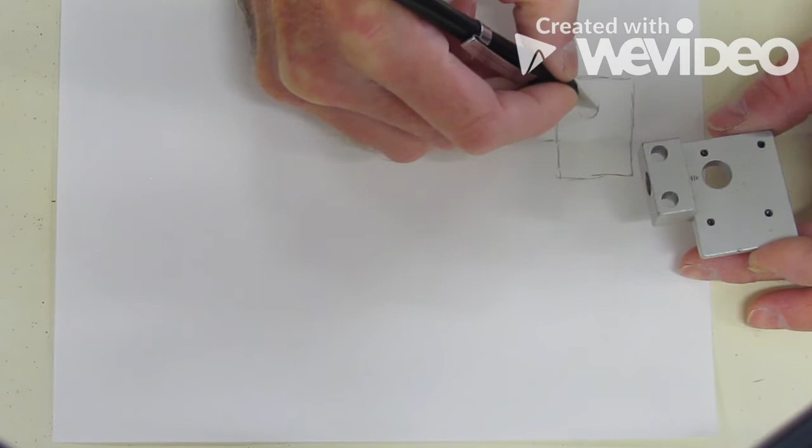I see a line there, little hole here, little hole there, big hole here, little hole, and little hole. So now there's my front view. My front view looks pretty cool. I like it. Do the same thing with the top view that we've been doing in the past.

We're just going to project up very lightly. Those are construction lines, trying to keep them nice and parallel. I'm going to create the front edge, and remember, that front edge now is this edge up here. So I'm going to rotate on that, and I'm going to see this, which is pretty neat.

So the back line is going to be here. And again, these are all construction lines, and we're going to do some erasing this time. So now, to get the rest of this, this projects up.

I'd have to do a little measuring here to know that this line exists here. This line would exist there. And these two lines would exist here. So there's my part. Like I said, we need to do a little erasing here, so these are going to go away. So far, so good.

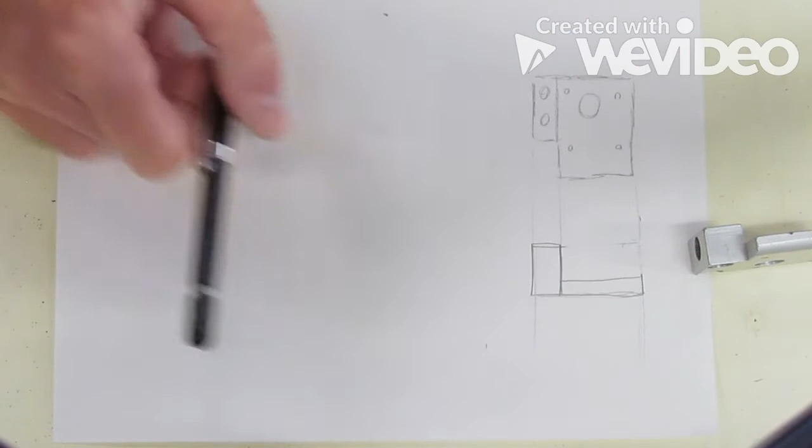Now we've got some other things we have to deal with. See these holes? We've been talking about tangent and kissing edges. Well, here we go. Each tangent edge of a hole deserves a hidden line here, because if you think about it, a hole in this view is a rectangle in this view.

It rotates. As you can see, my hands would rotate, just like this cylinder would rotate. It's a circle here, but it's a rectangle here. So we're going to see that here. We're going to project this up, and it's going to become a hidden line. We know from our part it goes all the way through, so it's going to go all the way through from the front to the back.

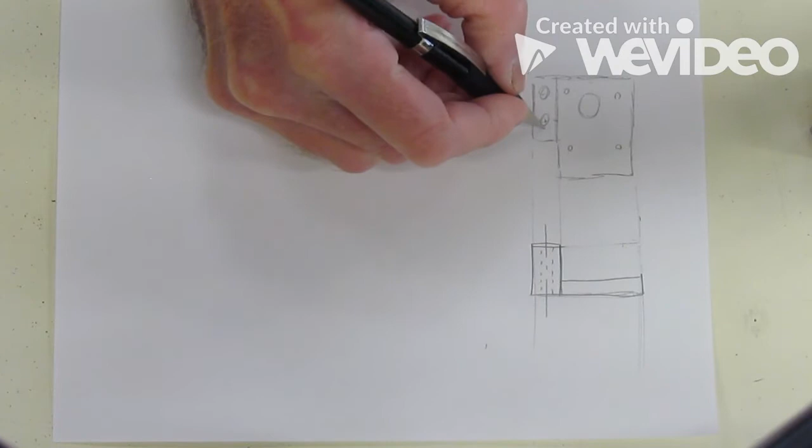In the middle of a circle, we always put a center line. Always have a center line in the middle of our circles. So we need one here, a little one here, and so forth. So now we have more lines: construction lines, object line, hidden lines, and a new one is a center line.

The little holes here are close together, hidden lines with a center line. We have the big hole we're going to project through, the edge here, and a center line. And then these little holes again, hidden lines and a center line. Notice the center line always extends beyond.

So now we're going to do our 45. I'm going to come over here, and this is our front. Remember, we're going to pivot like this. That's our right side view. So our right side view is going to look a little different. We're going to draw this out here.

I'm hoping that you're seeing now we're starting to show a lot more detail in our parts because our parts in orthographic show more detail. Even though we could show it in a sketch, this is a sketch, but our isometrics and our obliques kind of eliminate some of this detail. It's harder to show. So now we see more detail.

So now we're going to take this and project it over. This, remember, goes all the way through. We have a line here, and that line, where my index finger is, right here, this is the line we just drew. Well, it continues all the way through as a hidden line. So we're going to have a hidden line here. It's going to signify this surface that we can't see.

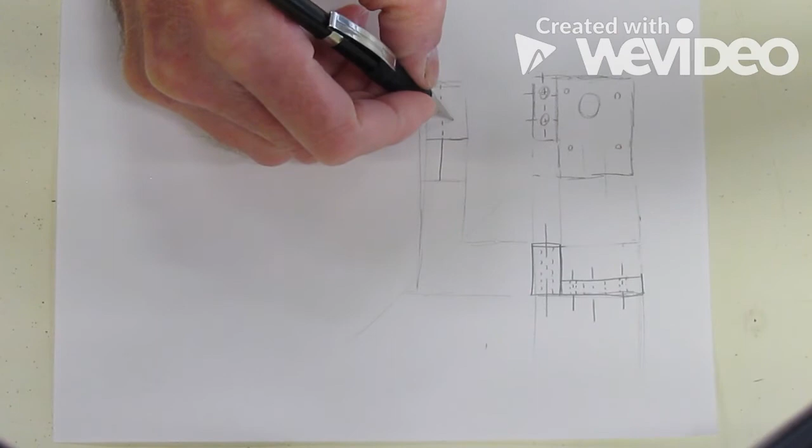Then I have a hole here. Whoops, I have a hole here. So I'm going to put that hole in. That's a counterbore hole, but we're going to leave it a simple hole for now just to make things a little simpler. I have some more hidden lines here, and this is where it's going to get confusing.

They go all the way through. This goes all the way through. More center lines. A lot of times we would have to do cross sections of this, which we won't get into here, to show what this looks like. And I'm going to stop there.

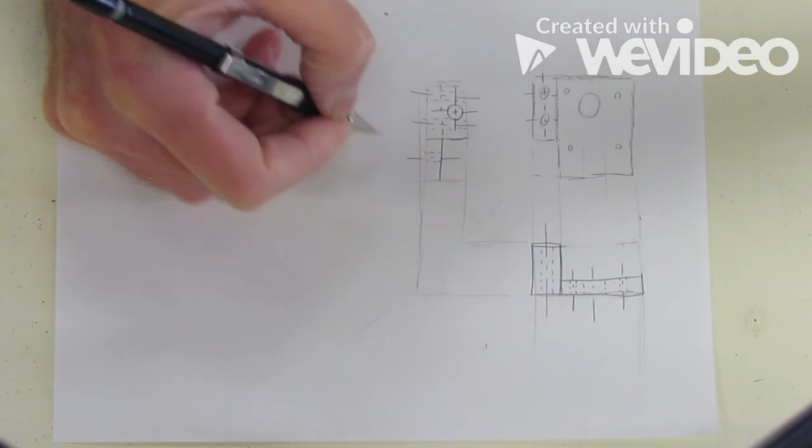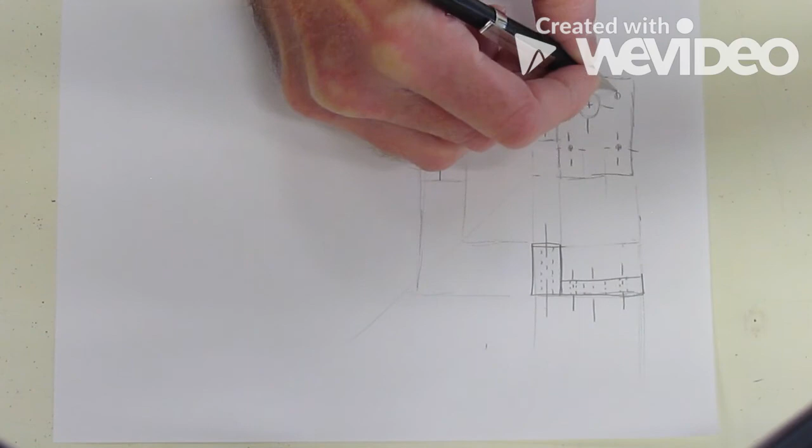If we start adding more hidden lines, it's not going to make any sense, and sometimes it's better not to add those hidden lines because the view is pretty clear as is. I would still need my center lines here, to show where the centers of holes are. I left those out earlier because it's easier to project those while we can see the edges, now that I've kind of screwed them all up.

So that is how to make an orthographic projection of part number 5. I hope that helps. Good luck, and let me know if you need any assistance.